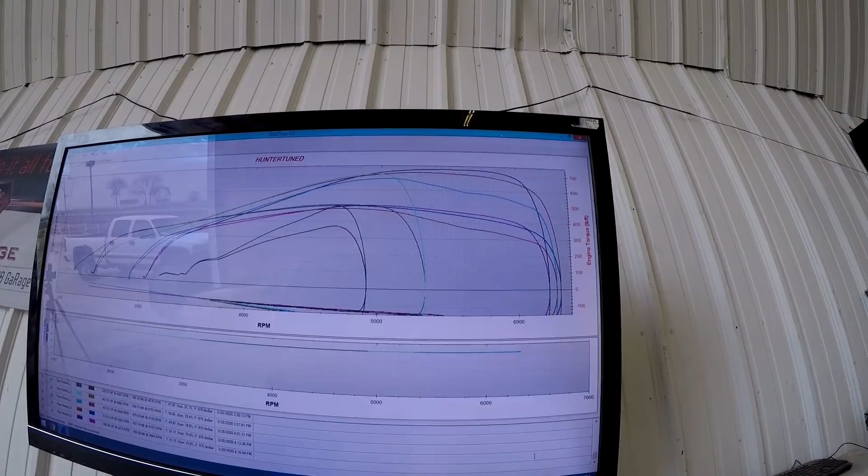Ryan had a bunch of fuel in above, like pretty much right when it came into full boost. It was kind of... now the camera's on me and I can't.

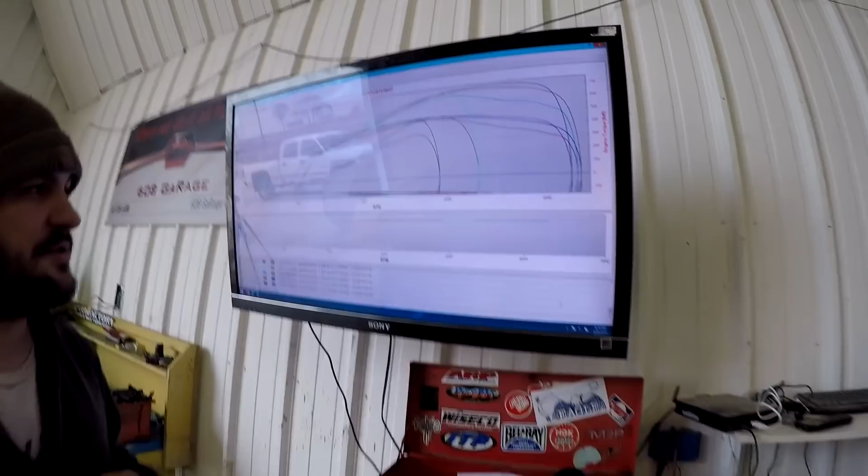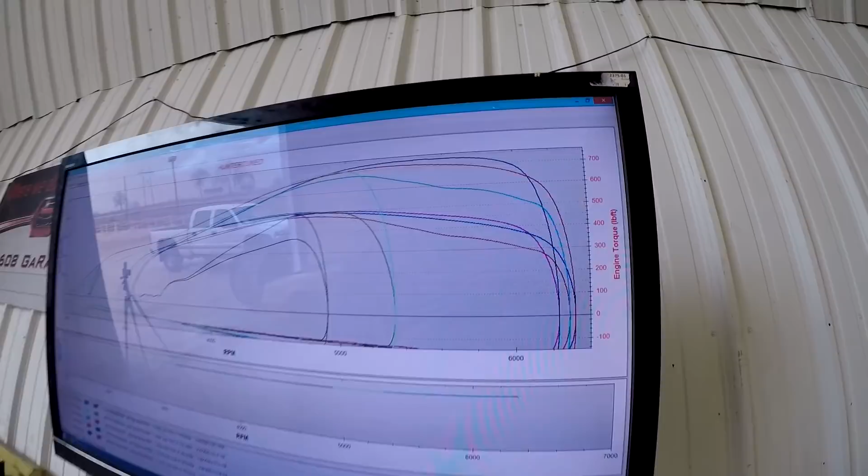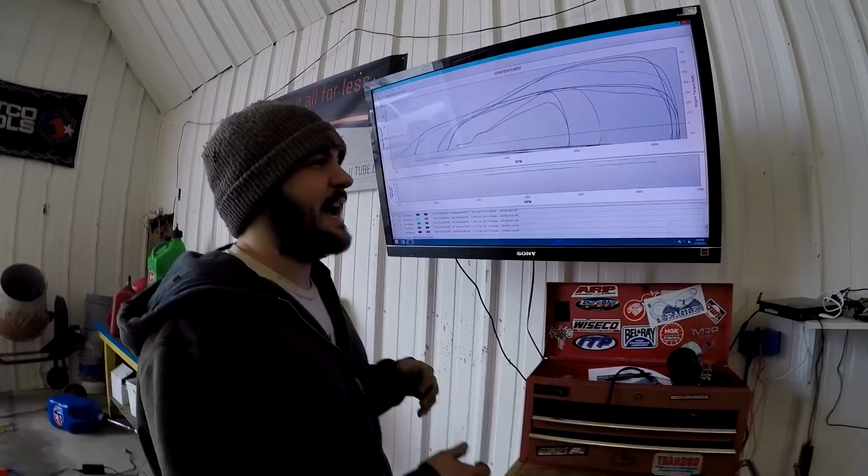Okay, so before when I was driving it, I only went to like 6 pounds. That was the highest. So anything above 6 pounds I never touched it yet, but I made it really fat before it came. And he wasn't really revving the car out that high, he was only revving it to like 60. So the first one I think was like 6,500 or so. And now we're spinning it to 7 - ish, 72. So from 6,000 to 7,000, he had a bunch of fuel in it just because you probably never even got to that RPM of this motor ever. So that part of the fuel map was kind of untouched. And it was just fat to be safe, and by fat it was really fat. You can see just in this area right here from us adjusting.

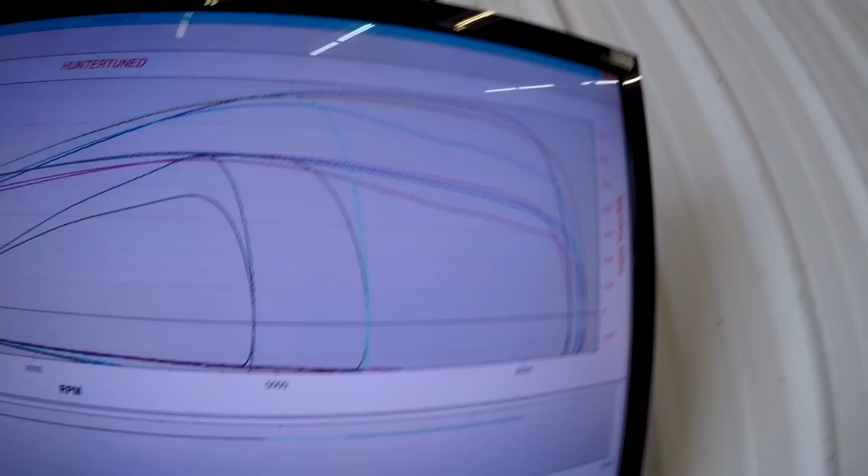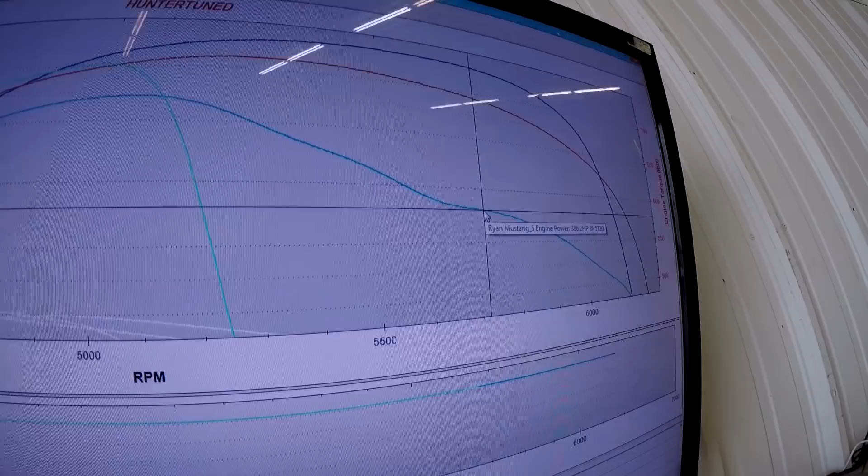So there's a lot of lines going on right now, let's just look at horsepower. I'm filming with the GoPro because I was recording a lot with the other camera and it already died. So this run right here is where we had too much fuel in. We were only making 387 horsepower at 6,500. The dyno's off about 1,000 RPM here - it says 57 but it's really 67. So right here we were making 386.

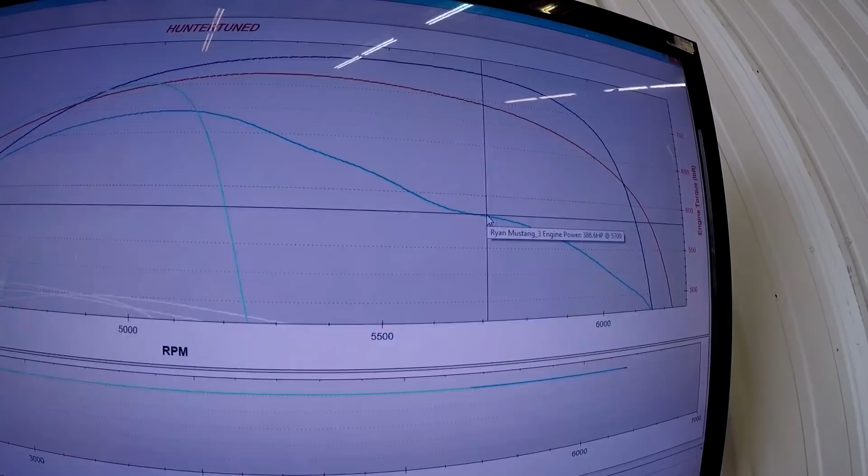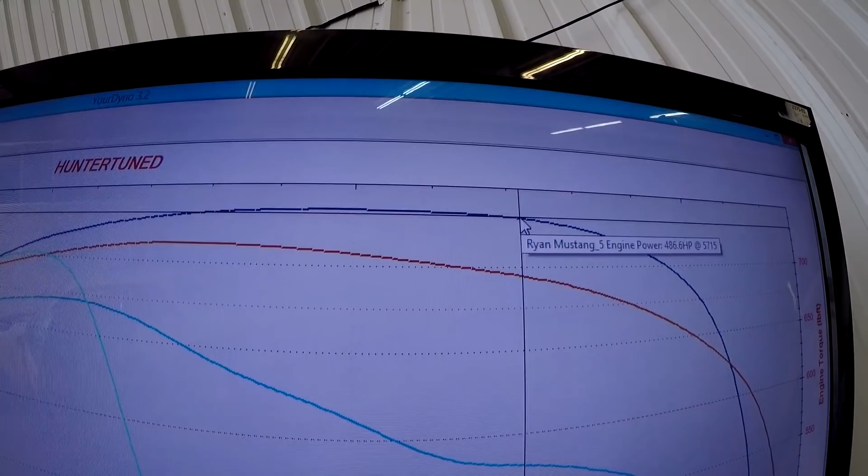All we did was a fuel change, and it picked up - what was the difference here? 386 to 463, same boost level, same timing, same everything. And then we cleaned it up a little bit more, and now we're at 486, just pulling like 8% of fuel. And it's still like an 11.1 air fuel. So we could pull out another 5% probably and clear 500. So we're gonna try that. And then maybe add a degree or two of timing and clear 530 without touching boost at all.

I've never driven on a dyno before, so he's kind enough to let me do it. And there's a lot going on here, so he's really helping me out with what to do. So this is kind of cool - very different with the computer and driving, starting the dyno, and there's a lot going on. So pretty cool.

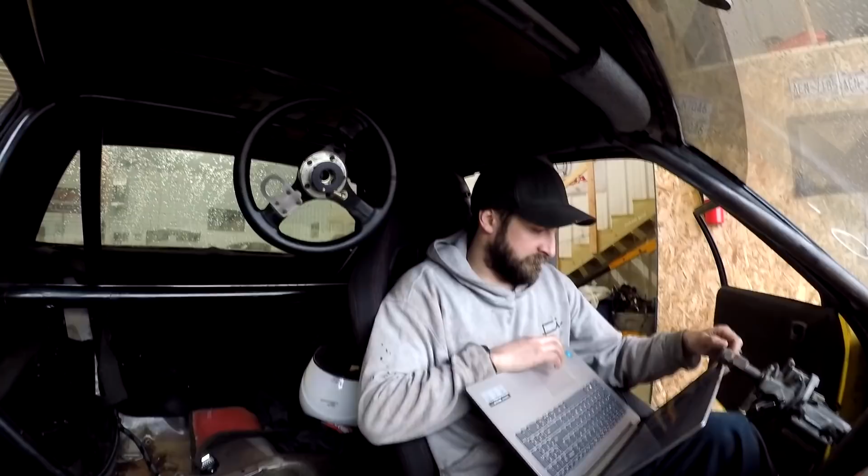So as I said before, I'm just kind of getting my feet wet with Micro Squirt and Tuner Studio, and Hunter has a lot more experience than I do with Tuner Studio. He uses a gold box, and has a low 9-second Mustang he's had for a while, so he's a lot more familiar with this software than I am, and he's able to teach me a lot of stuff. I do have some experience with HP Tuners, and we do things a little differently in some areas, so it's nice to get his perspective. I'm used to how long it takes with HP Tuners to data log and then shut the vehicle down to rewrite the file, and he's teaching me some simple tricks on how to do things faster and clean things up. Pretty cool.

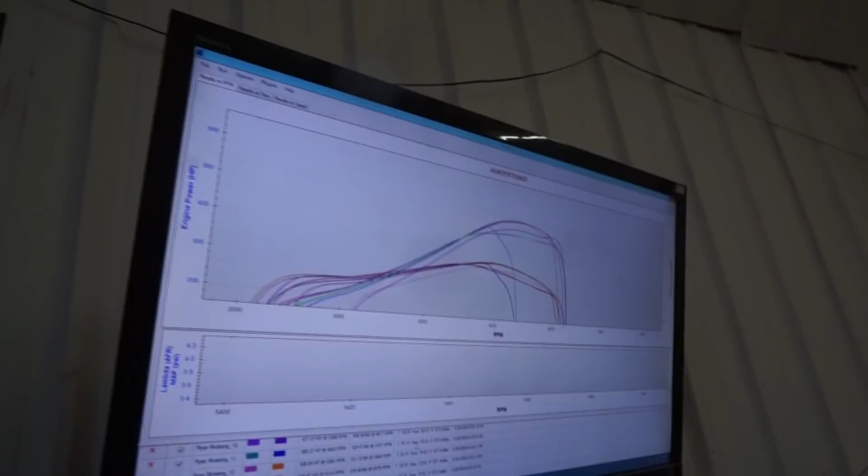So we're just going to look this over, and then I'm going to leave. We did 14 pulls, log runs, 14 that we logged. We did some just for fun, but here we'll show the good ones. Yeah, let's just show the good ones. We're YouTubers, we're YouTube Dynoers. So we only got to show the good ones.

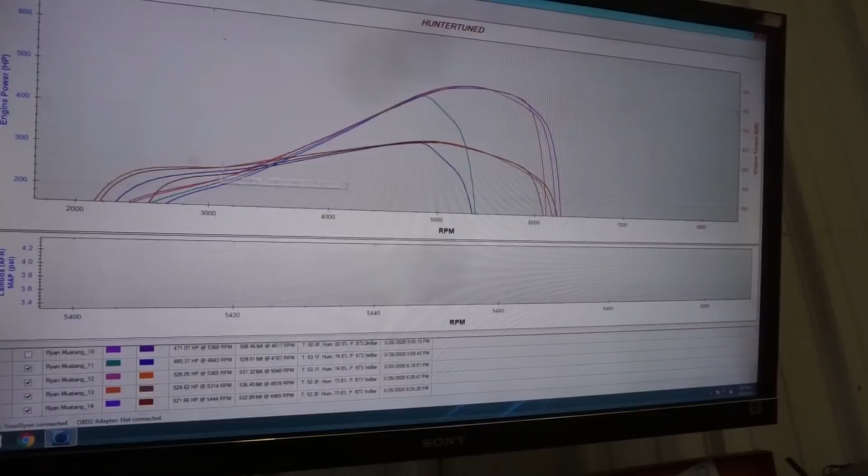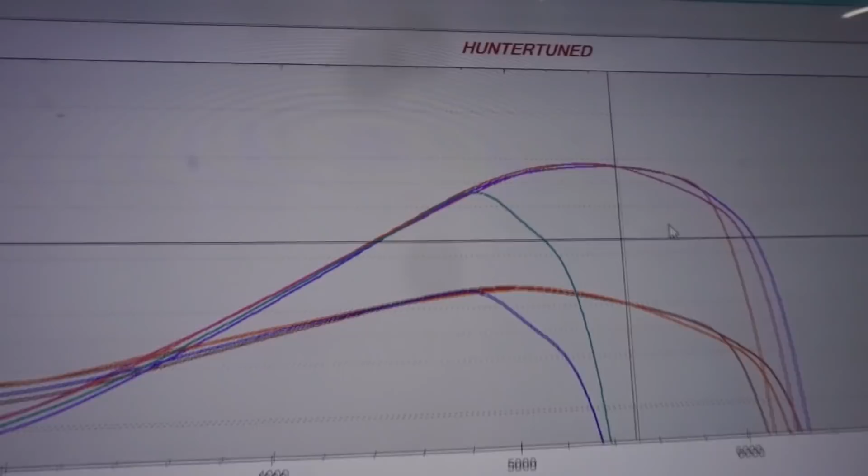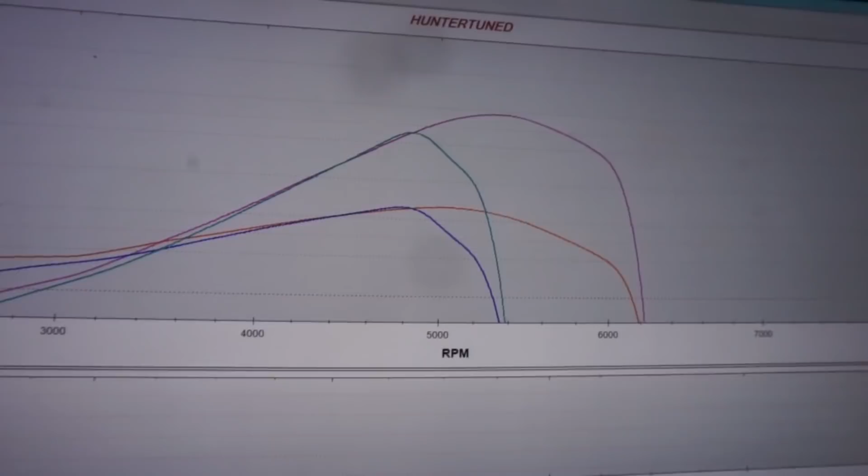You could have kept going on that pull right here, but you got out of it because you said the boost looked like it was going to the moon. That was the first one, yep. So just staying in it, you know, it did that but it nosed over really hard. Right, then you pulled some fuel all the way up top, and it picked up there.

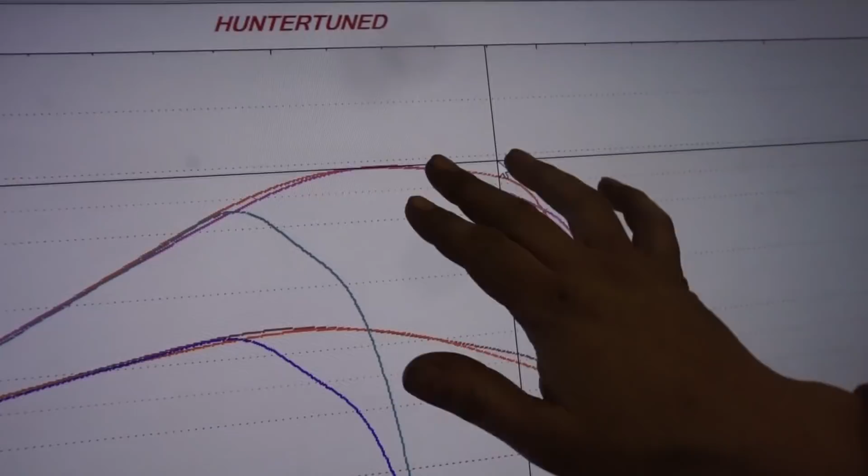You could still stand this up a little bit more with a degree of timing, probably. You could add a degree right here to bring this up, so it's not falling off like that.

But I also feel like something, I don't know. You have a pretty short power window, which kind of sucks.

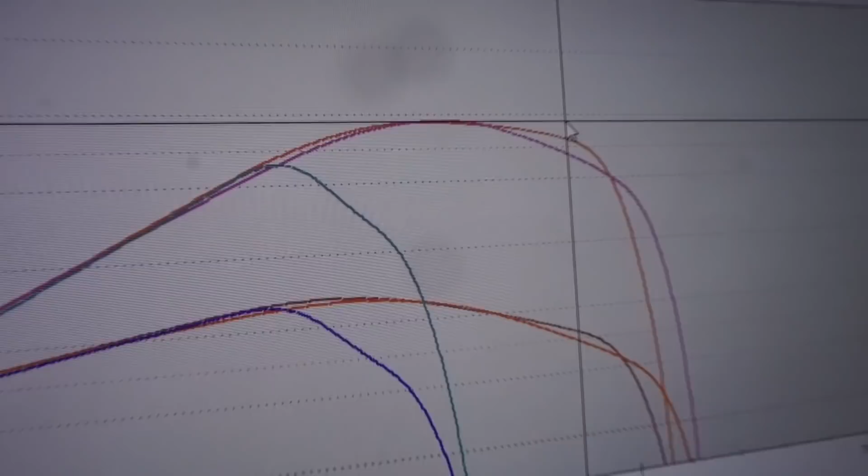So what was the final number? 526, it made. 26, yeah. And the orange one. Yeah, okay, 526 is the orange one.

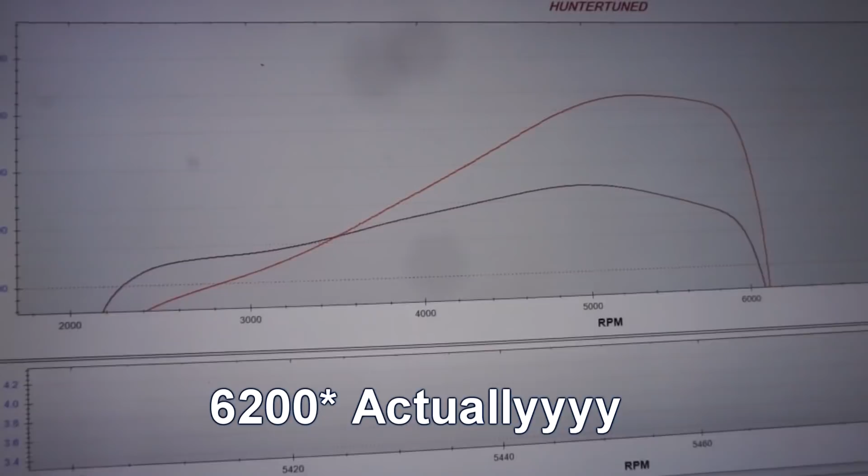So this is kind of exactly what the turbos look like. They don't really hit full boost until probably almost 5 grand, 4,500, 5 grand. That's the best looking one we got. It takes a little bit to come in. I can show some of the logs, but that was like 14 pounds, like 14 or 15 degrees of timing.

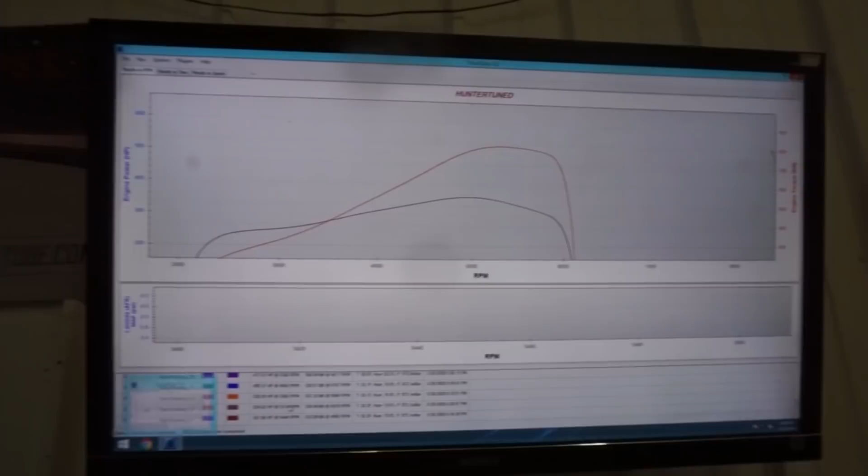524, 526, whatever, 26, and a lot of lessons learned. Not really 100% dialed in yet, obviously. You haven't really put... I mean, it's on 15 degrees, like you said.

Yeah, the fueling is so sporadic on this thing. I don't know if it's lean or if it's rich or if the gauge is lying to us. What we're seeing is basically 5,800 at 6,000 and above, it would just nose over to like a 10.0, 10.7.

Yet the fuel map was the same number from 5 to 7,000. Right, and we pulled like 30% out of it. Yeah, something crazy, and it was still doing the same exact thing. So yeah, it's definitely a little weird, and it's kind of sketchy to not know.

And the way that the air fuel gauge is, it's not like it comes up to an 11.5 and just hang out around 11.5. It's like 12.8, 12, 12.5, 11.5, 11.0, 10.0. Yeah, it's kind of all over.

Yet the fuel map, the VE table, is fairly smooth. Like it shouldn't be doing that, I was like, really smooth, even the same numbers. 12.5 and then, yeah.

But we did kind of solve some of the bucking a little bit, but still in first gear, light load, it's like, you can see it in the video, it looks like shit.

And actually, when I was going out there just now, I told Ryan he should do a plug check when he gets home after doing all these runs, to just see if the plugs are even, if they kind of all look the same, and to check the porcelains and make sure they're not cracked, because you could be down a hole or two right now, and we don't even really know.

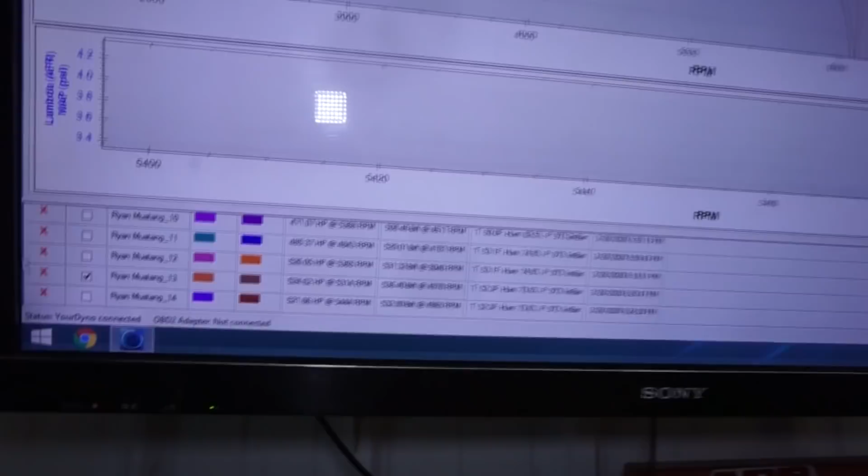Ryan number 1, so that's the first one. And then this is the second pull. So this one was kind of on target, but look at how much we gained up here. Yeah, 466, 517, and at that spot, you know.

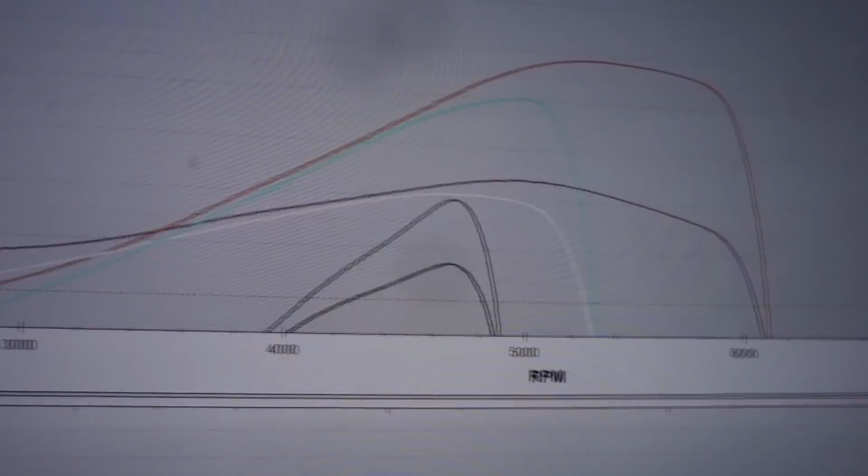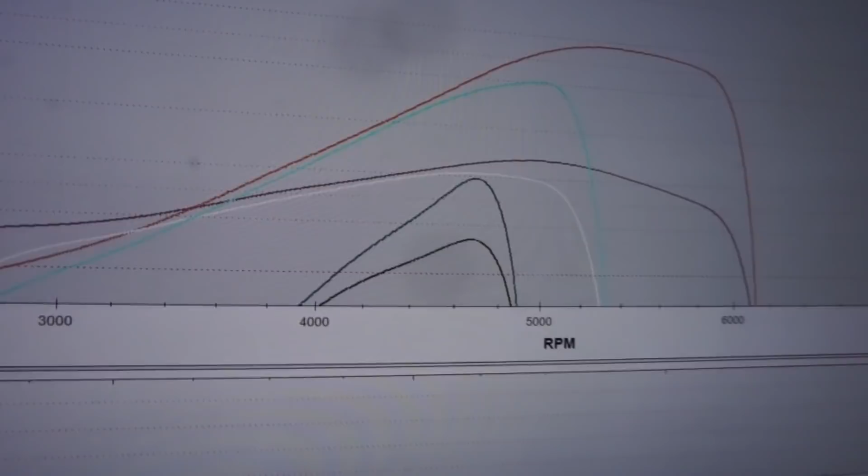So that was when it came in at like 5 pounds, and that was just the first one, right? Yeah, I think you just pussyfoot. Yeah, and I just lifted way early, so... Oh, because I had that boost leak and fixed it.

Oh, okay, that's what it was. So I fixed that boost leak, and then I was just watching, and it spiked way above where it was before, so I lifted it. Yeah, so I didn't know where it was going to go, but everything's working.

Yeah, I mean, the car hasn't exploded, there's no oil on the ground, we didn't break anything, it's not on fire again.